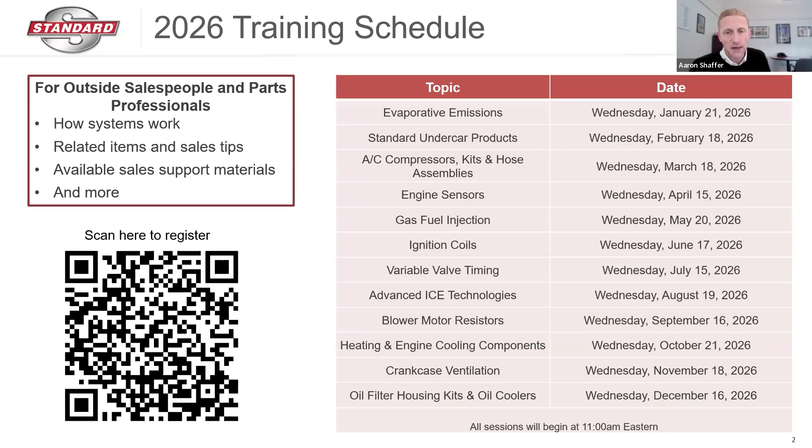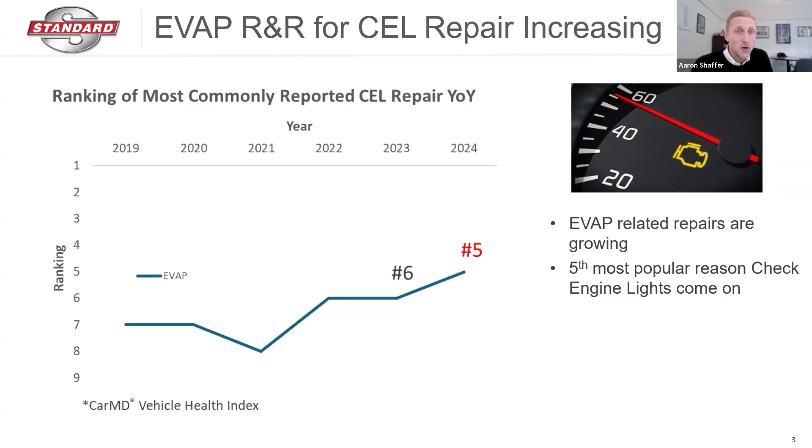Now, this is definitely a growing category. If we go back to 2019, evaporative emissions was the seventh most common reason a check engine light was triggered. But as time goes on, it's risen in popularity. We don't have data for 2025 yet, but I would suspect it would probably be number four or five. It was number six in 2023, number five in 2024. We're going to talk a little bit on the next slide as to why this category is growing.

So something interesting happened back in 2014 that you probably didn't know anything about, but it's having a big impact on parts sales today. Going back almost 12 years, the federal government did a couple different things that changed how new vehicle manufacturers have to design and engineer EVAP systems. First, vehicle manufacturers were forced to significantly improve their leak detection systems. Secondly, the government changed the allowance for hydrocarbons that can be emitted before a check engine light is triggered. What they actually did was cut this allowance in half, meaning check engine lights are going to come on more frequently.

This first started rolling out around 2017 model year vehicles. Vehicle manufacturers were forced to have full compliance by 2025. So a lot of the EVAP opportunities you're seeing coming into your customer shops now are really on later model vehicles - a lot of 2019, 2020 stuff.

So you might be wondering what happened. Well, this is what happened. All of this is going to lead to very strong sales of EVAP components over the next couple of years.

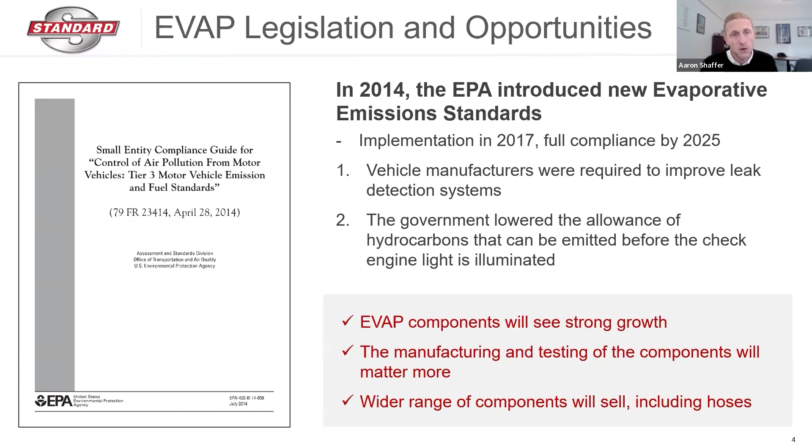Specifically, we can relate this to hoses. Hoses were not a big category on vehicles built prior to this legislation, but these more sophisticated systems are really driving a quick explosion in sales of hoses.

So really what we're going to go over today: a nice overview from our training team on how this system really works. We're going to discuss the different types of leak detection systems vehicle manufacturers are using, how and why specific components fail. We're going to offer some great tech tips you can use when troubleshooting with your service provider customers, speak to some of our engineering improvements for durability, give you a nice survey of the competitive landscape, and then dig into the sales support materials available to you so you can take what you learned today and bring it to the street.

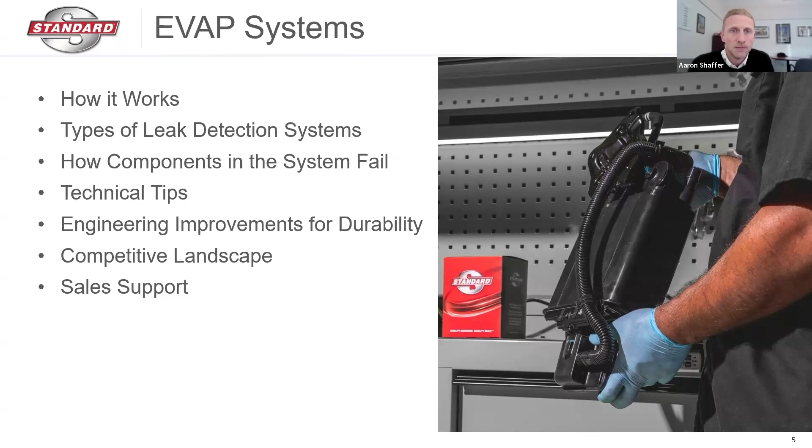So let's say you pull up to the pump and your fuel gauge is riding on empty. It's pretty safe to say that your fuel tank is full of fuel vapors. In older vehicles, when we filled up the tank, the fuel vapors in the tank would simply exit through the filler neck, giving you a really good whiff of gas as the vapors smack you in the face.

The vapor canister is full of activated charcoal that adsorbs the fuel vapors. Adsorbs means the fuel vapors are just hanging onto the surface of the charcoal temporarily. The charcoal does not absorb or internalize the vapors. With the charcoal adsorbing the fuel vapors so loosely, they wick away easily and can be pushed through the system by fresh air quite easily.

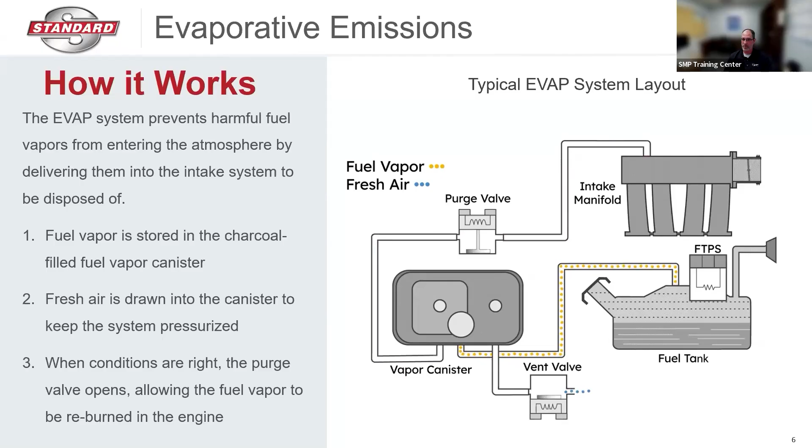In accordance with a federal mandate, manufacturers must now have an EVAP leak detection system that actively tests the system for leaks. The new EVAP regulations being implemented by the EPA come with a lot of latitude as to how manufacturers can decide to develop and improve their leak detection systems, and how to lower the number of hydrocarbons released into the atmosphere before that check engine light turns on.

And this is where we get the variety of leak detection systems that we see in cars today. There's not a one-stop shop for leak detection system design. So I'll take you quickly through several different types of leak detection systems that you might see on the road today.

The first being the ESIM, or the Evaporative System Integrity Monitor, which is something you'll see primarily with Chryslers. The ESIM is actually attached directly to the EVAP canister and uses weights and a diaphragm to mechanically monitor and test that the EVAP system is sealed. Just as an aside, these ESIMs are typically a relatively high volume item.

Secondly, a lot of European manufacturers use mechanical leak detection pumps, which use a vacuum controlled by an electronic pump that pressurizes the system under certain conditions to verify that it's sealed and not leaking. And then the last two types of detection systems either rely on an electric pump to create positive pressure in the system to check for leaks, or an electric vacuum to create suction to check for any leaks.

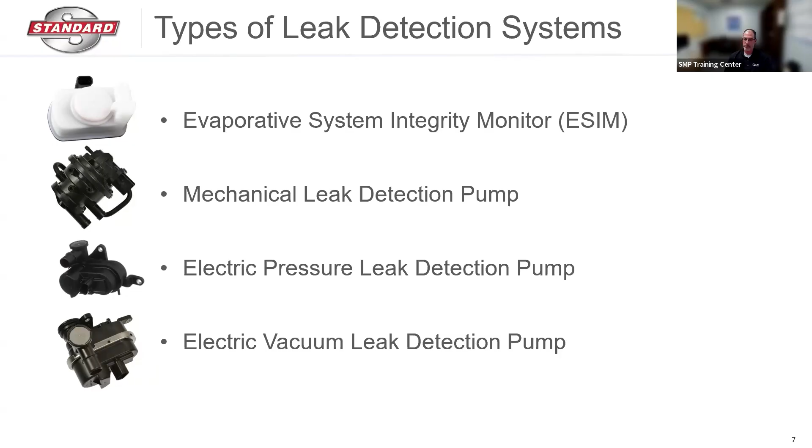So when it comes to EVAP components, the big question is how do they fail? The main culprits are typically just wear and tear caused by good old time and road conditions. This wearing of the system may lead to leaks, stuck or broken valves, cracked lines, and possibly electrical issues. It's important to remember where these systems are located, typically on the bottom of the vehicle. Brutal road conditions, potholes, debris, along with heat, vibrations, and possibly even poor OE design can all play possible factors in how quickly these components may fail.

Also, if the driver is constantly topping off the vehicle fuel tank while at the pump, they're actually creating conditions where the charcoal in the vapor canister could become saturated with liquid fuel, and this could prematurely or permanently damage the EVAP system. So just keep in mind the canister is meant to store only vapors, not liquid fuel. And this brings me to our pro tips.

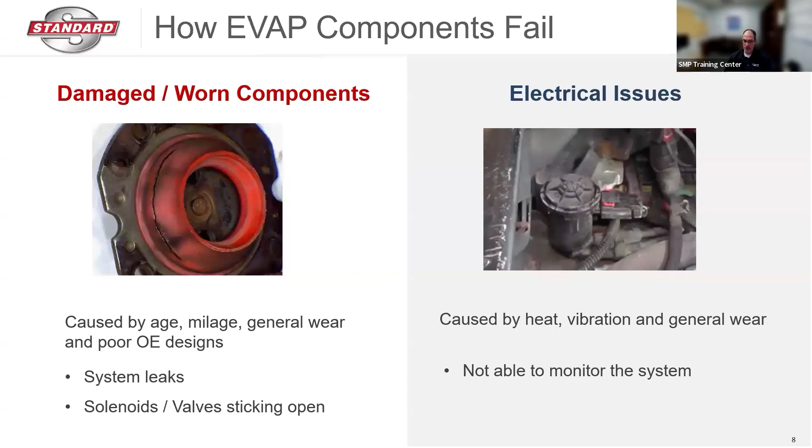When dealing with a failed purge valve, a typical response is to just replace the valve and move on. But many times there are underlying issues within the system that replacing only the purge valve won't solve. So in addition to replacing the purge valve, we strongly recommend replacing the vapor canister as well. Remember, a failed canister can contaminate the entire EVAP system.

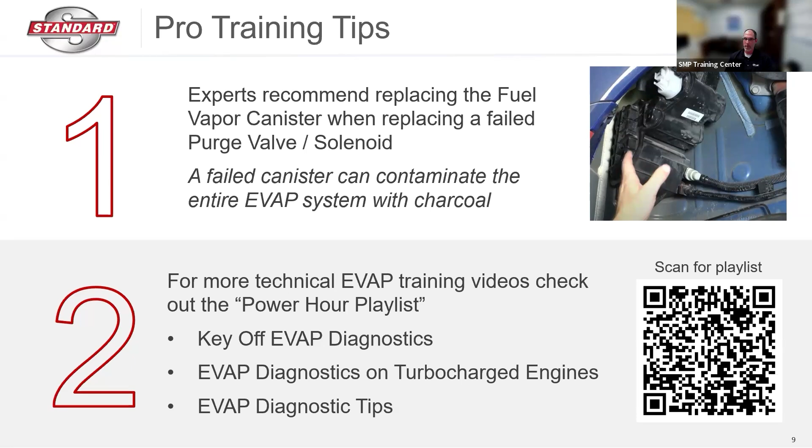Thirdly, once an EVAP repair has been made, it's always a best practice to run a self-test to ensure that no diagnostic trouble codes have come back around, lighting up the check engine light on the dash again. After an EVAP repair, pressure or vacuum leak detection tests with the help of a scan tool will definitely confirm that the system is in good order and working as it should.

Lastly, sometimes we come across leaks that are so small that no diagnostic trouble codes pop up. These EVAP leaks can oftentimes be difficult to find. One of the best ways to locate small EVAP leaks in the system is to use a smoke machine. This isn't something we'll have at the house or necessarily in all shops, but it's a great problem-solving tool best used by professionals who diagnose and repair those potential EVAP issues.

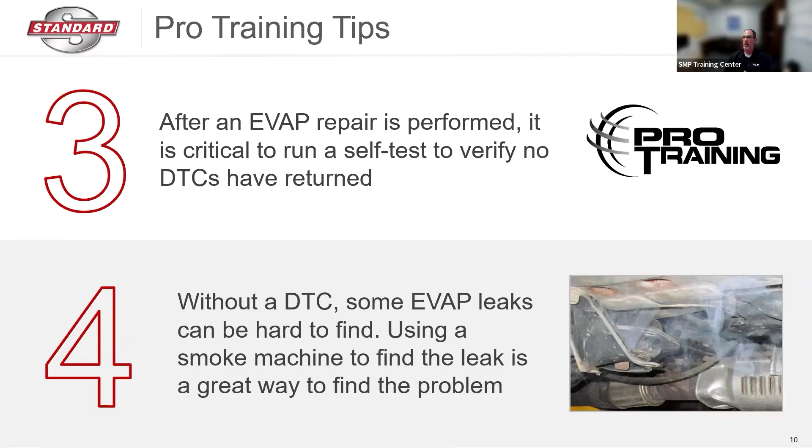Hopefully this overview on the EVAP system, the common failure points, and the pro tips we shared will help open up some meaningful conversations for you. And with that, my time is up, and I'll turn the presentation back over to Ed with the product development team.

Thanks, Pat. Let's talk about products. When you reach for the Standard box, this is what you'll expect to find inside: parts that have gone through the R&D process. We have 15 fully equipped research and development facilities around the world, including LIC, which is our headquarters.

You also get precision manufacturing, because we're also a tier 1 aftermarket supplier. We have 21 manufacturing facilities, including Greenville, South Carolina, and Independence, Kansas, which specialize in emissions control components. You also get lab tested and qualified parts, along with dynamic in-vehicle testing at our testing center in Texas.

Additionally, for every part in the box, you get sales support and training resources from the Standard team on demand through our training programs, our video library, and support from our marketing and category management assistants.

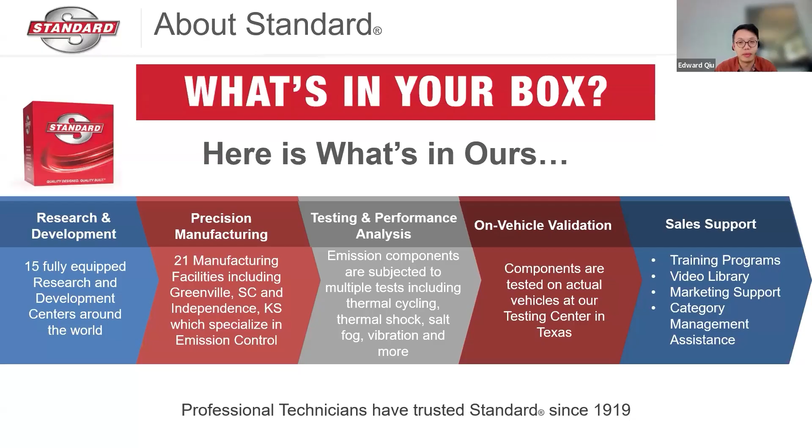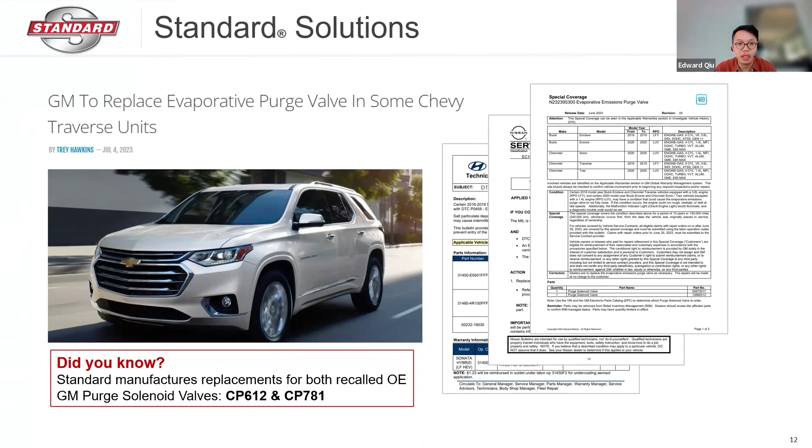The product management team continually monitors emission-related recalls and TSBs to identify opportunities where Standard might offer a solution. A great example involves failing purge solenoid valves on a number of late model GM vehicles, including the Enclave, Encore, and Traverse. Standard manufactures parts designed for improved durability to replace these failing OE units. Let's take a deeper dive into a couple of those.

Here's one example of an OE purge solenoid valve on GM vehicles known to prematurely fail, where the seal on the plunger assembly cracks. We overhauled the design of the plunger assembly so that the plunger is kept in better and more consistent alignment, which reduces wear on that seal, resulting in a longer lasting part.

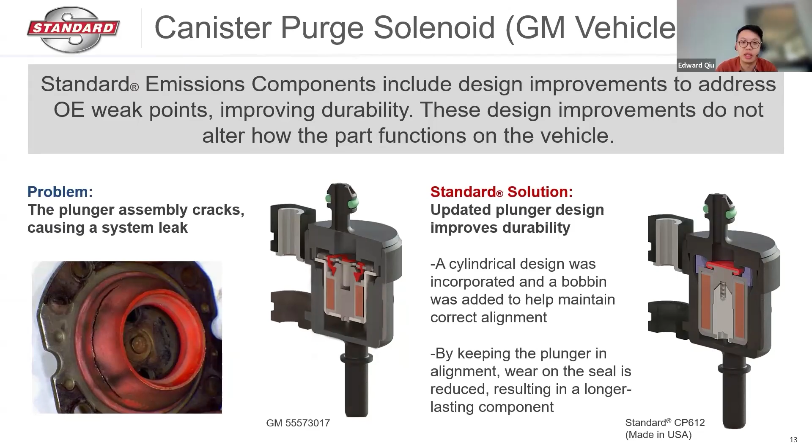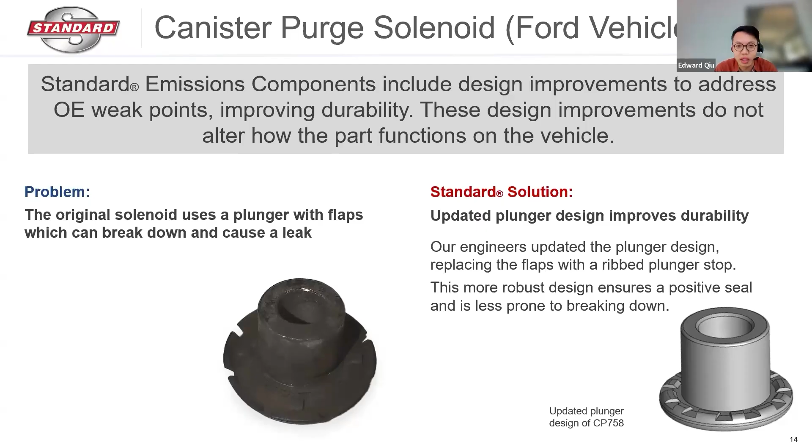Here's another example of an OE unit on Ford vehicles that fails because the plunger in their purge solenoid breaks down, and the debris from the plunger can cause the valve itself to stick open. So we redesigned the plunger by removing the cookie bites in the seal around that plunger and reinforcing it with ribs to make it less prone to tearing. In doing so, the plunger is less prone to breaking down and effectively extends its service life within the solenoid.

The EVAP system is complex and sensitive in order to meet regulatory requirements. This makes the quality of EVAP products critical to a vehicle's performance, fuel economy, and emissions. Here are 3 things you should look out for in emissions products that you recommend to your customers.

First, all the related parts for a complete repair. Remember, these are parts that operate in a complex system, and your supplier should be able to service the entire system if needed, not just cherry pick the best sellers.

Second, parts that have been lab tested and vehicle tested. Testing on a bench only tests the part's static performance. Testing in vehicle ensures that the part functions as expected in a dynamic vehicle environment.

And lastly, this is important: we have to be careful in cases where we do deviate from the OE design. It is only for improved durability and a longer service life. We make no changes to how the part functions, how it performs, or how it interacts within the vehicle system.

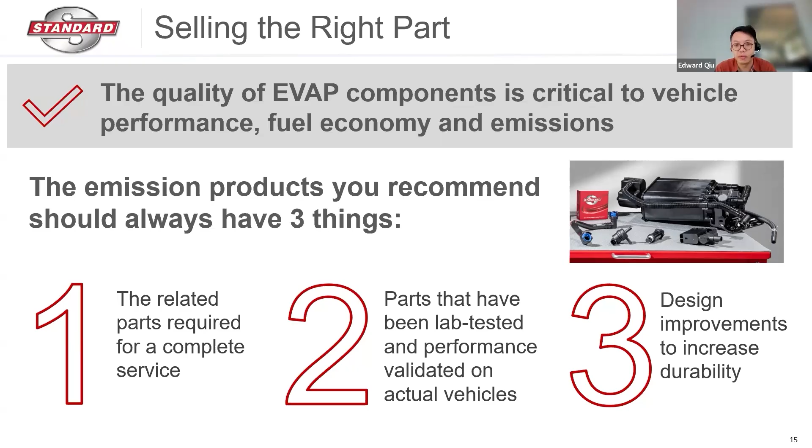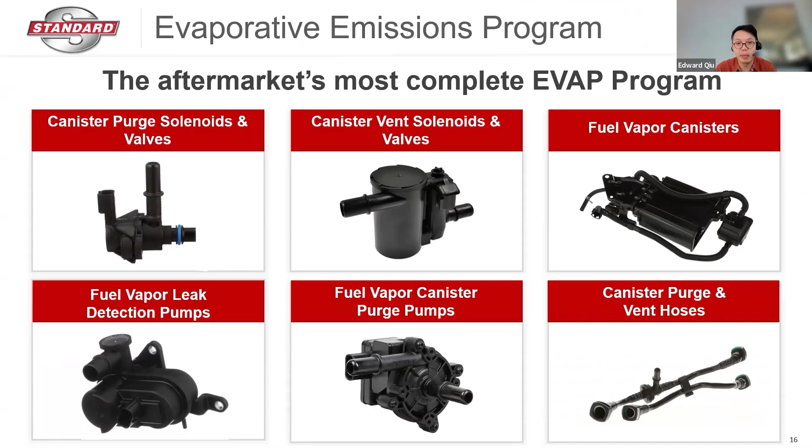We offer almost 1,200 components in our EVAP program, and this wide coverage is critical to capitalizing on service opportunities for newer vehicles. Our newly introduced hoses, as mentioned earlier, for example, are a rapidly growing category, and no one comes close to our coverage in this category.

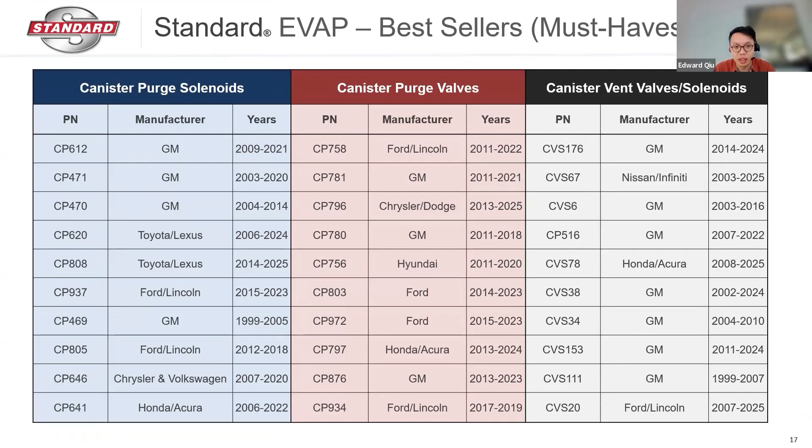To make things simple, here are the EVAP components that you should be keeping an eye on. These are the big movers that you should have on your shelves. These are the top 10 parts from each of our top 3 performing EVAP subcategories: Canister Purge Solenoids, Canister Purge Valves, and Canister Vent Valves and Solenoids. This shopping list alone will give you 67% EVAP coverage.

Sales of EVAP components have often spiked as soon as it gets hot and vehicles come out of warranty. Now is a great time for you to make sure you are ready for the selling season and increase demand of EVAP components for late model vehicles.

So what does up and coming mean? These are parts that we've released in the past few years. So for example, EEH041 and CP122 we released back in 2023. We'll talk a bit more about the CP122 a little later.

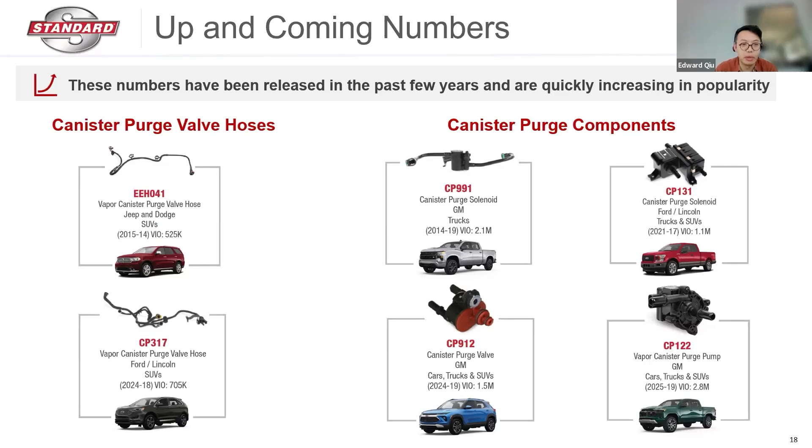We've gone over shopping lists, so let's compare our offering to our competition. The numbers don't lie. Standard leads the aftermarket when it comes to full line EVAP coverage. Standard has breadth of coverage, depth of coverage, and we're competitively priced.

Speaking of competition, for your information, late last year we caught wind of a new competitor, Motorad, who we are expecting to launch a large short line of EVAP components sometime this month. As we would with any new competitor, rest assured we have our finger on the pulse and are proactively monitoring and adapting our EVAP product offerings to compete.

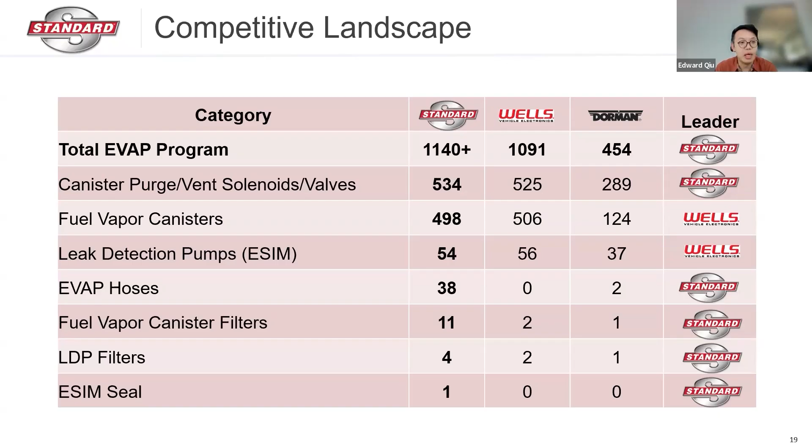From our experience, short line suppliers typically can't meet the demands of the industry. It takes 165 different canisters, for example, to cover 90% of sales, and 213 for 95% coverage. We also like to add value where it makes sense. For example, all of our fuel vapor canisters for Chrysler and Stellantis vehicles already include a new eSIM.

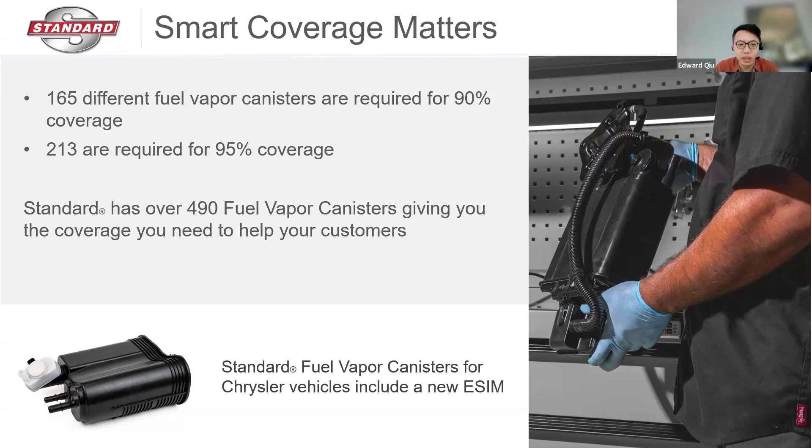We continue to command the EVAP space because Standard is also a Tier 1 aftermarket manufacturer. We pay attention to every detail of every part. The eSIMs are exclusive to Chrysler and Stellantis vehicles, and their main purpose is to report if the EVAP system is sealed completely. So it's critical that our LDP 14, as shown here, which we designed and manufactured at our Greenville facility, matches the OE eSIM, even down to the H-shaped cross-sectional profile of the O-ring.

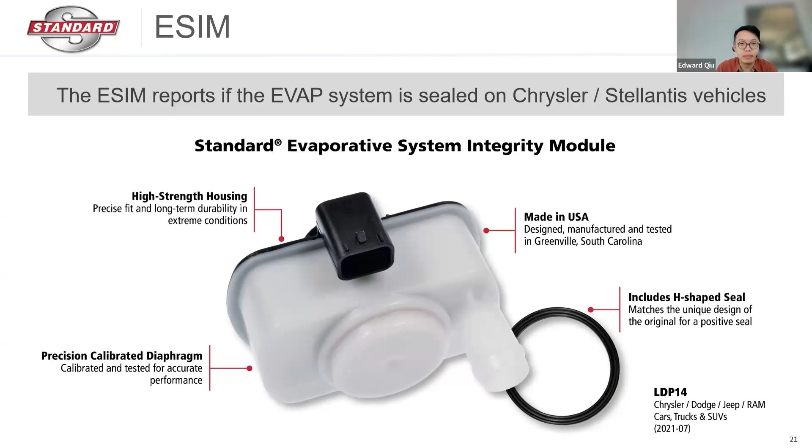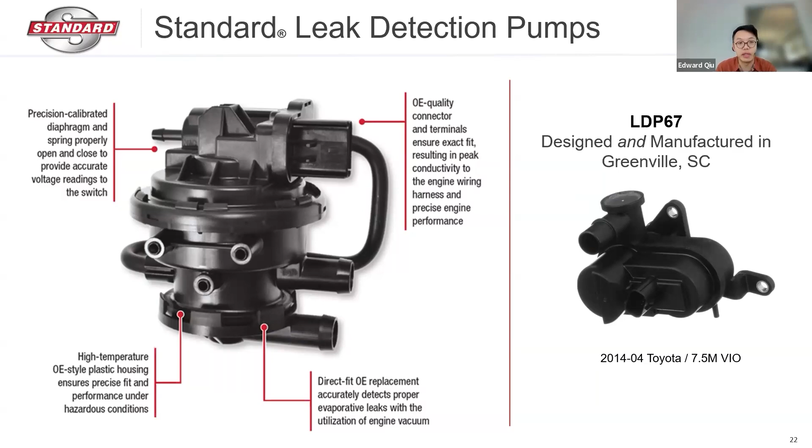Leak detection pumps are one of the more complex components in the EVAP system. As the name suggests, they allow the EVAP system to be pressurized for the vehicle to perform tests for leaks. Given their complexity, you shouldn't be surprised to hear that they require expert manufacturing to perform correctly, and our incredible team at the SMP Greenville facility has risen to the occasion, designing and manufacturing several of our most popular pumps to match OE specifications and set the aftermarket standard for quality and durability.

In addition to offering the most complete program, we also offer the smartest product offering. As I mentioned earlier about the CP122, one of our up-and-comers, all of these OE GM numbers use the exact same canister purge pump. The only difference are the brackets. Our CP122 is a direct replacement for all these OE numbers, allowing you to cover millions of popular GM vehicles with just one standard part number.

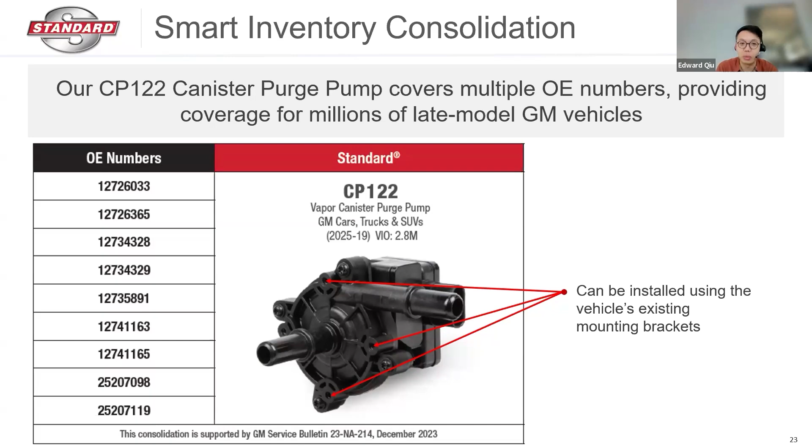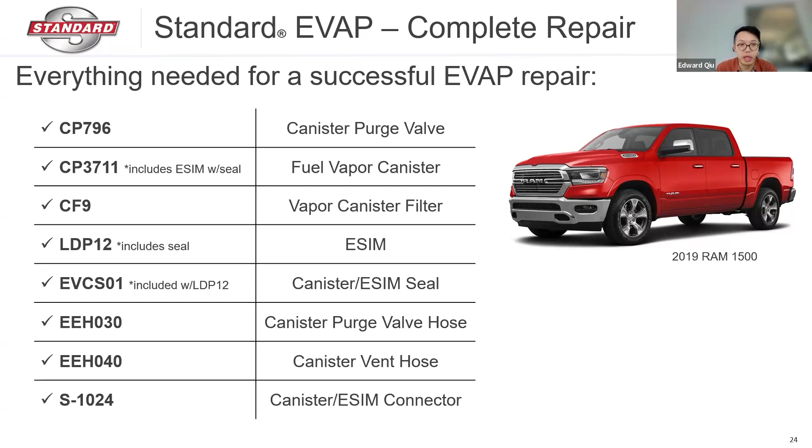Full line coverage means we offer everything needed for a complete EVAP repair. The 2019 Ram 1500 shown here with the 5.7 liter Hemi and standard fuel tank is our most recent example where we have a Standard part for every part in its EVAP system. We also offer options for multiple configurations of this vehicle, such as the Pentastar 3.6 liter and extended fuel capacity models. This is just to reiterate that we provide the breadth of coverage that our competition does not.

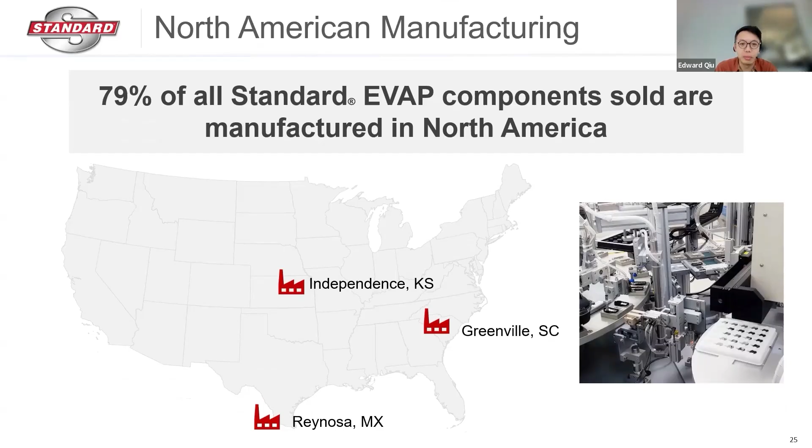Another big benefit of our EVAP program is that almost 80% of our EVAP components are manufactured in North America. This helps ensure a more stable supply chain. Most competitors are sourcing components entirely from China and other low-cost countries. We also offer complete programs in other popular emission categories like crankcase ventilation, EGR, and diesel emissions, which includes the diesel EGR valves.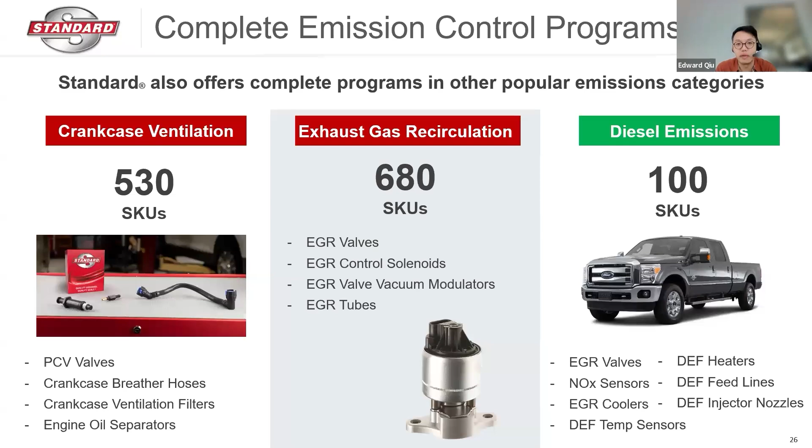Customers will buy what parts professionals recommend, and at this stage, we need to make sure that the audience understands the testing and validation that goes into qualifying our parts for production launch. We perform life cycle and end-of-line testing. We also perform extreme and accelerated testing similar to how OEs do it, including wear, thermal cycling, thermal shock, salt fog, vibration testing, and more.

We also do dynamic on-vehicle testing at our test center in Texas to ensure that the products that we make behave as expected in different driving conditions and vehicle loads. The end result is a quality part that meets not only fit, form, function, and regulatory standards, but also has improved durability. With that, I'll hand things back over to Aaron from marketing.

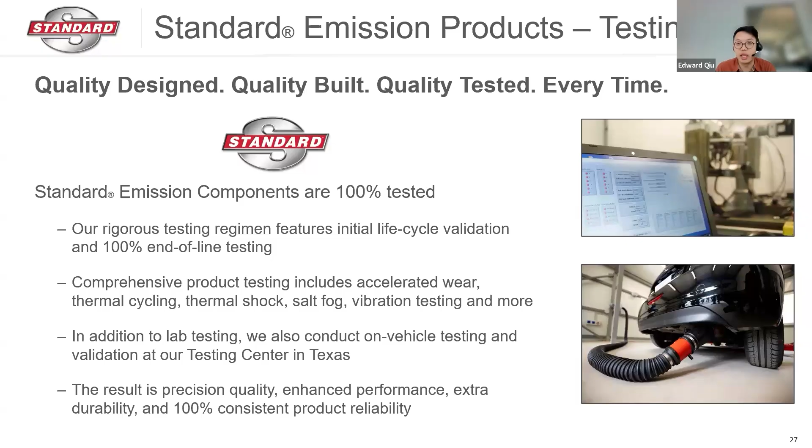Awesome. Yeah, thank you very much, Ed. So I think Patrick and Ed did a great job of going over the program, why quality parts are so important. What I'd like to take a minute to do is just give you a short overview of the printed materials that we have for you to really take this message to the street.

All of these can be found under standardbrand.com. At the top of that, you'll see something that says digital resources. You can click on that, and then there's a search bar. You can type EVAP, and PDFs of all of our EVAP components will come up. The other thing you can do is if you have a local rep, go ahead and reach out to that local rep and ask for some of these materials so you can take them to your service provider customers.

But we have a 6-page brochure that outlines our entire EVAP program, all of the parts that are available with that, and we highlight some engineering improvements. We also have some additional detail on the up-and-comers that Ed went over. Again, those are numbers that have been released in the last couple years that are starting to see very, very strong sales out at the store level to shops.

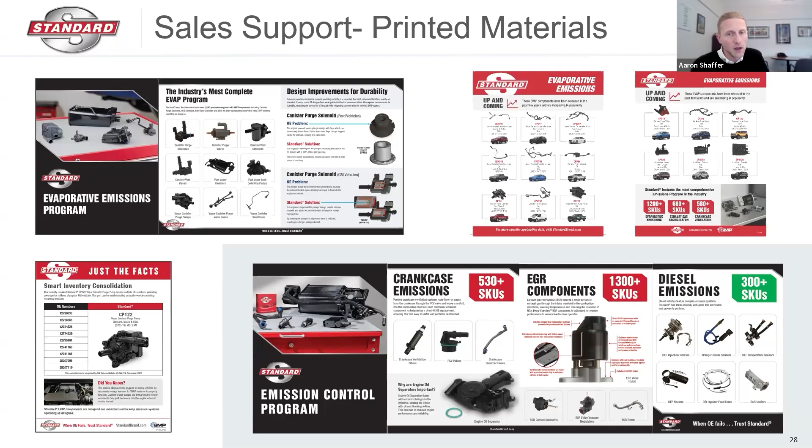We have a nice single-page piece on the CP122, that pump that Ed just talked about. And then if you need to tell a story of the entire emissions program, something beyond EVAP, we have a detailed 8-page brochure that's available that really outlines the entire program.

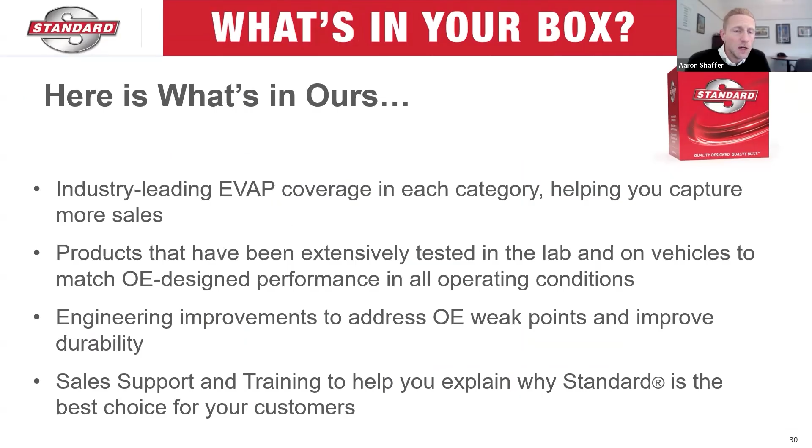So yeah, thank you very much for tuning in. Just to bring things home, the things you're getting with this program are the industry's best and smartest coverage in the category, the related items you need to be able to offer your customers a complete service, products that have been tested not just in the lab, but also on vehicles, specific engineering improvements where it's appropriate, so you can offer your customers parts with additional durability over the OE design.

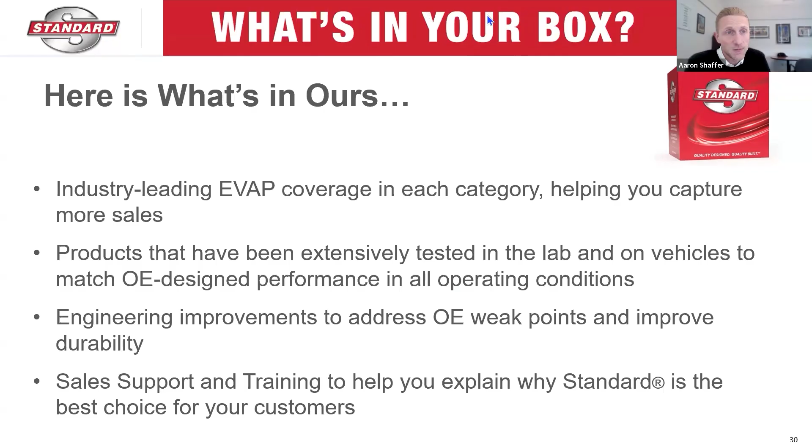And as we just went over, we really try like heck to provide you folks with all of the printed and digital materials to help you do your job, as well as technical training and free training events such as this, just to keep you up to date on the latest trends within specific categories, so you can certainly sell more parts. So that's what we have for you today, and thank you very much.